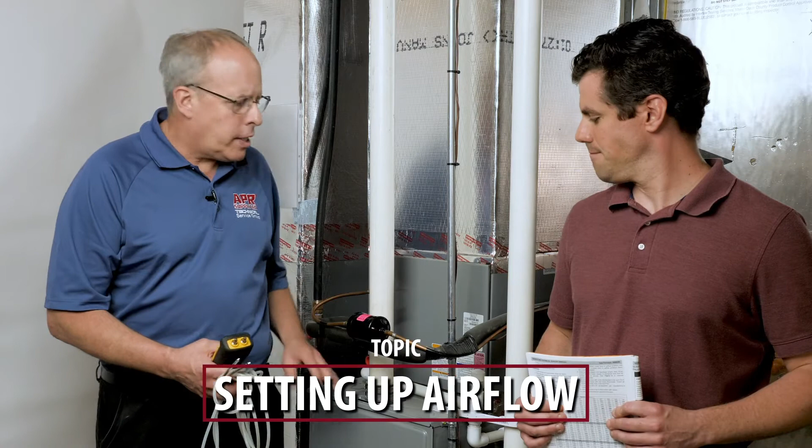Today we're going to discuss how to set airflow for this gas furnace with air conditioning combination. To do this properly, you're going to need a dual port manometer with static pressure tips, as well as the manufacturer's information to reference for airflow.

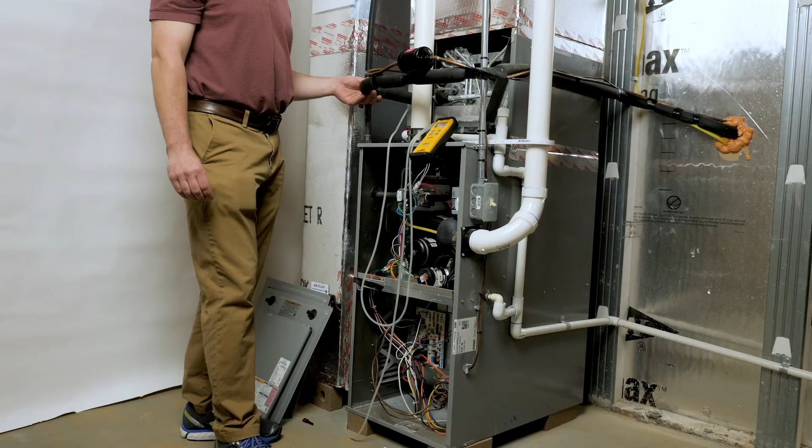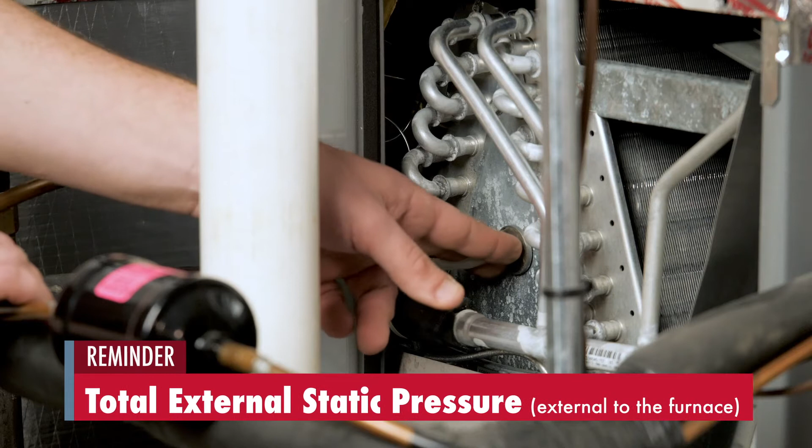Now we're preparing the unit for the static pressure test. The first thing we have to do is get our static pressure probes in place. To get the top static pressure probe, remember this is total external static pressure, which means external to the furnace. So we have to get a static pressure probe in a position that's below the air conditioning coil. This can be very difficult at times.

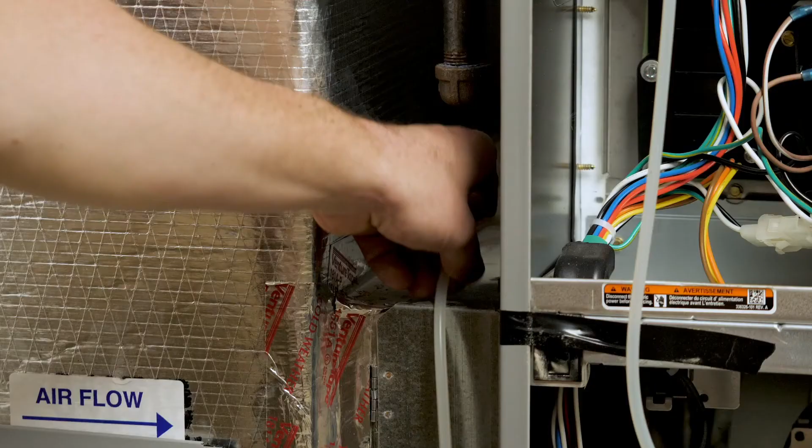What we recommend is putting our static pressure probe directly into the delta plate in the front of the coil. The low pressure static port has to go between the filter and the blower. So we've chosen the spot here in the filter box between the filter and the blower.

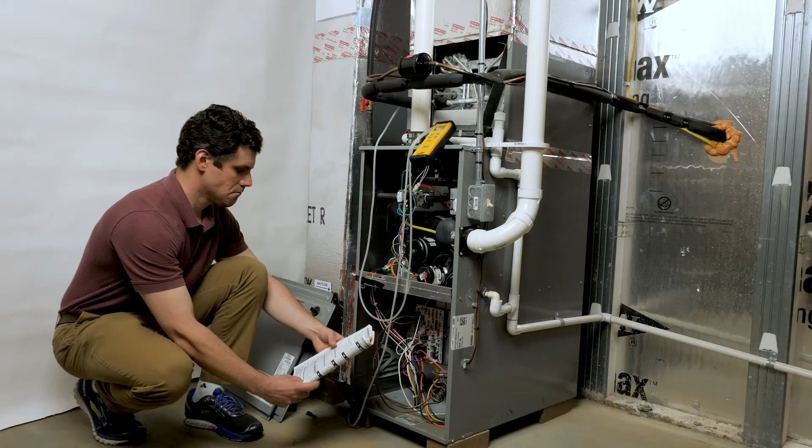And then finally, we have to move into the board and see which speed is set to the cooling. In this case, with the furnace with the PSC motor, it's done by wires going directly onto the board, and we've chosen to use the blue wire, which is medium-low, as our start point for testing.

We're now set up to do our static pressure test. Static pressure is going to be used to verify the airflow for this system. First, we have to determine what the correct airflow is supposed to be. Our 2-ton system will require an industry standard of 800 CFM. Heil uses 350 CFM per ton, which gives us slightly better dehumidification.

So we have our static pressure tips in and the coil box closed. We have our static pressure at the return, and we're set to the blue speed of this blower. So we'll now turn on the system and compare our static pressure to the chart to determine airflow.

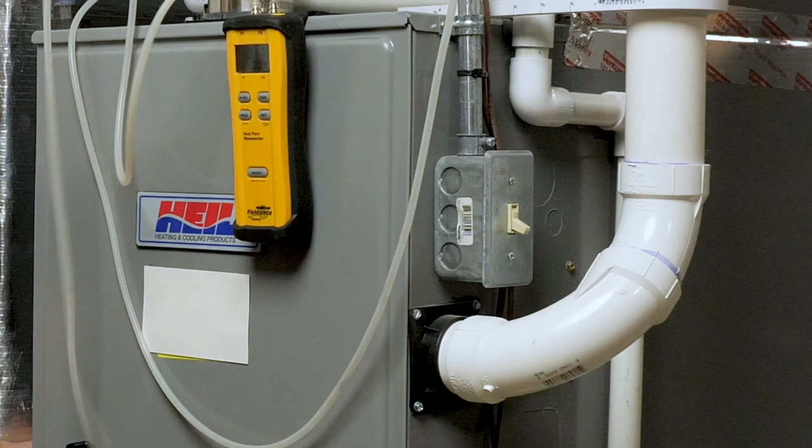Now we're going to measure the actual external static pressure. So remember, everything that is external to this furnace box, we want to find out what resistance that is putting onto our fan. So Matt, go ahead and put the high side static pressure tip on, and let's see what our high side static pressure is.

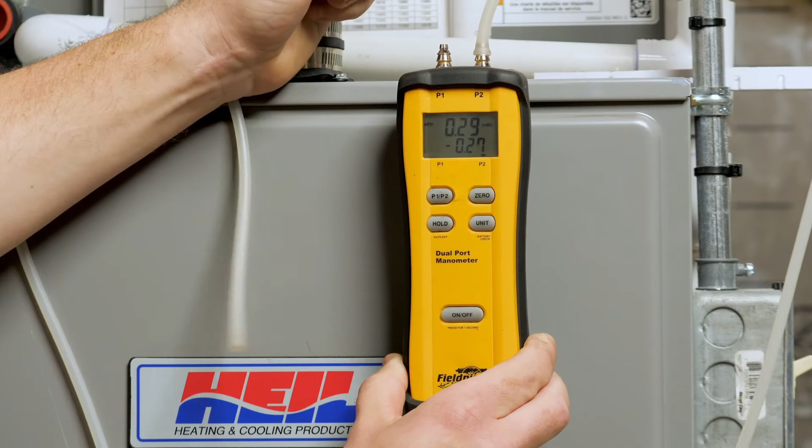And now let's remove that just so we can see each one individually. Let's get the low side static pressure separately. You may have to zero that meter again, it's very sensitive. And now we have the low side static.

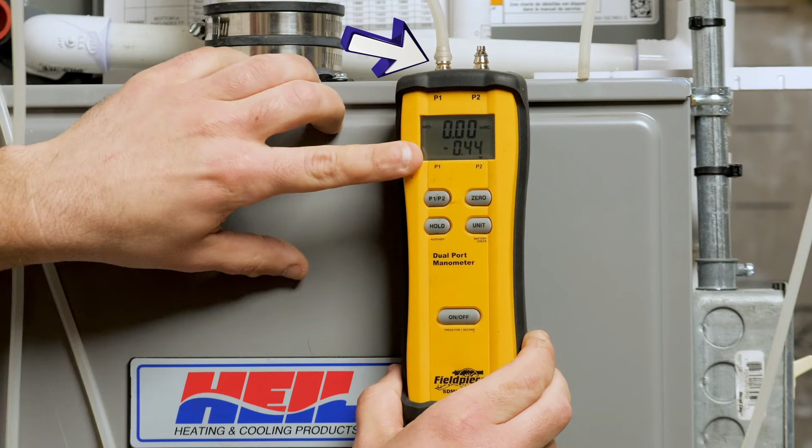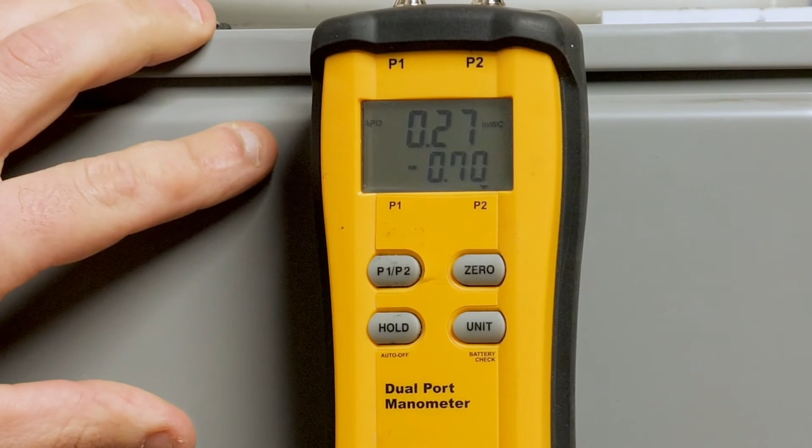Now let's just go ahead and add the high side back, and the meter will calculate the total external static for us. And what do we get for total external static pressure?

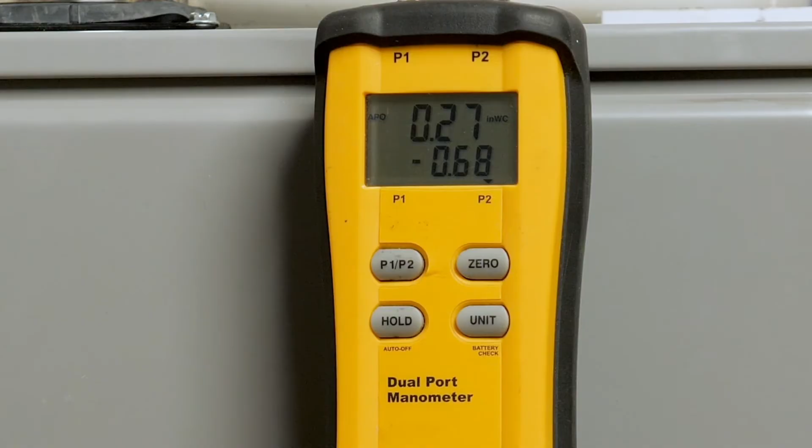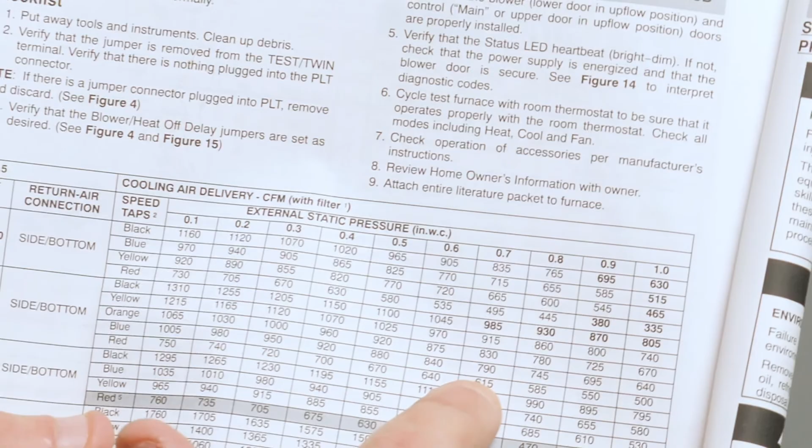At this point, what we're going to do is compare that to the manufacturer's chart for this furnace. Remembering that we have the blower set to the blue speed, and following over, we'll use the 0.7 static pressure chart. That will give us the airflow setting for this system as it is installed.

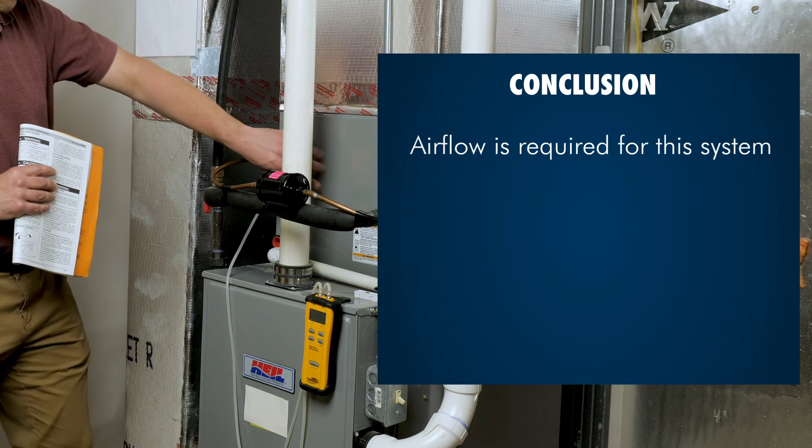In our example, airflow is what is required for this system. If your airflow in your system is not correct, you will have to adjust the blower speed to achieve proper CFM.